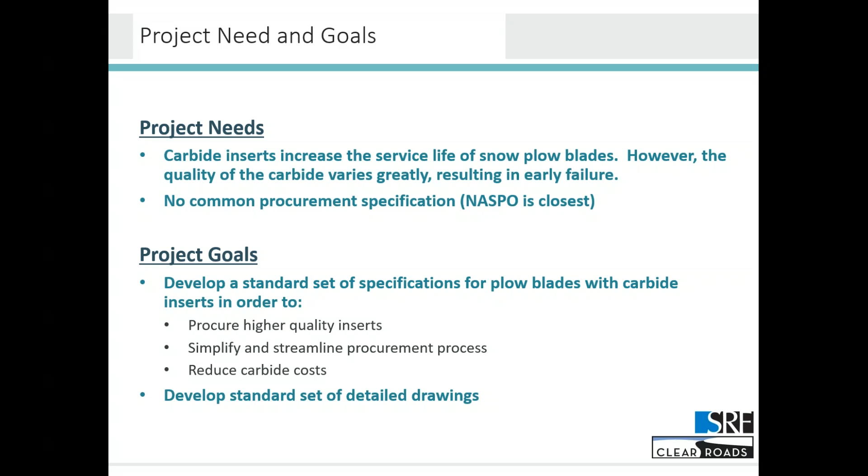So the first thing we conducted was a literature review. We looked at what's been done with other projects, and the main one I want to highlight is Clear Roads 07-01, which I actually worked on along with our sub-consultant Larry Kirchner. This project looked at the development of standardized test procedures for carbide insert snowplow wear, and we looked largely, in a laboratory setting, at what kind of test procedures or inspection makes sense when looking at these carbides, things like looking for visible cracks and doing tests such as hardness, density, porosity, and grain size.

One of the findings of this project was that carbide insert quality and service life are most affected by manufacturing methods, and a poor manufacturing process is more likely to result in a failure than the actual composition of the carbide itself.

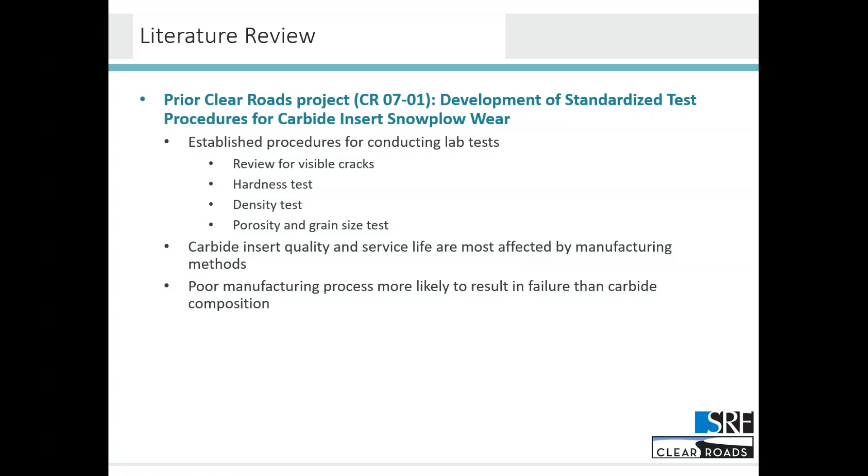So having this background was important, and it refreshed myself. It had been several years since I'd worked on that previous project, and when we started this one up, we dusted off those findings and did a literature search to see what had been done more recently, and not a lot was out there.

We found 7 different studies, the first one dating back to the year I was born, 1967. Some of these were not quite on the mark. A lot of them looked at blade configuration, such as underbody plows versus wing plows, and how effective they were for moving ice and snow, and specialty blades.

One finding was that uncontrollable environmental conditions have the greatest impact on blades, which makes it difficult to isolate exactly how a carbide insert is functioning when the environmental conditions are rough and variable. It was also established that improved plow performance comes with carbide inserts, even if it's hard to measure with environmental factors.

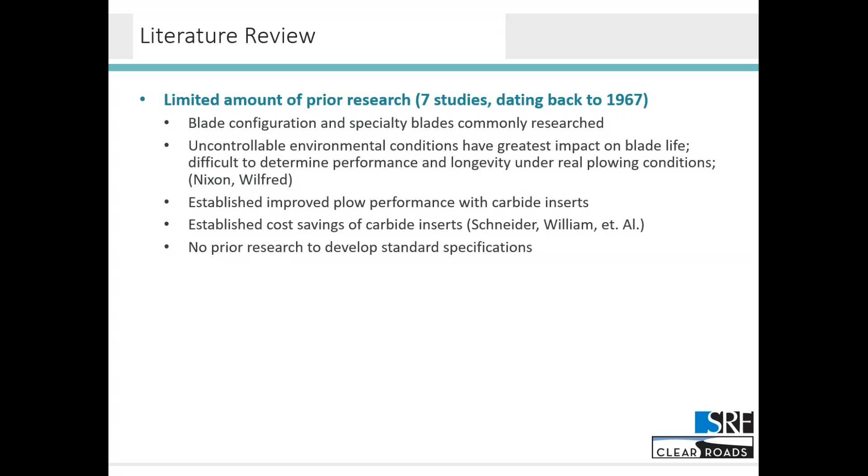There is definitely a feeling overall that blade wear is extended with the use of carbide inserts, and therefore there is cost savings involved. Finally, no prior research had been done to develop standard specifications, which is the topic of what we're doing.

So existing agency carbide specifications was the next aspect of the project, and we took a look at what was being done out there. The clear road states are very organized and were very effective at passing along their specifications. We got a total of 34 different agencies to provide them.

There were 3 states that were not members of Clear Roads that sent them in: New Jersey, New Mexico, and Oklahoma. So those might be candidate states to try and get to join Clear Roads if they're dealing with some ice and snow down there. A couple of counties also sent them in.

9 Clear Road states said they're using the NASPO specifications that I mentioned earlier. We tabulated all these different specifications across multiple individual specs, and there's quite a bit of variety in how different states were specifying these categories, but there's also some commonality as well.

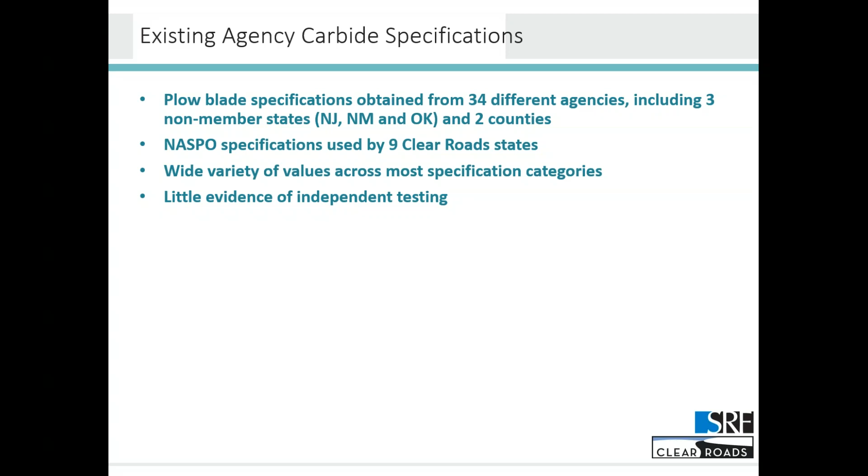We also found little evidence of any independent testing done to verify that the carbide being procured actually matched the specification that had been published.

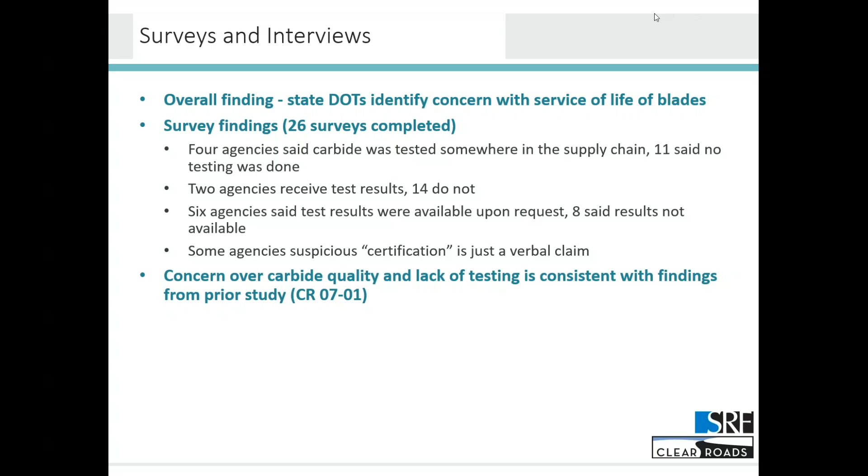We sent out a survey to these vendors. Again, the survey was broad, ranging from questions about number of orders per year to what testing is being performed on inserts before they're shipped. We only received one response on the email survey, so we then had to reach out by telephone, and we were able to receive some valuable input.

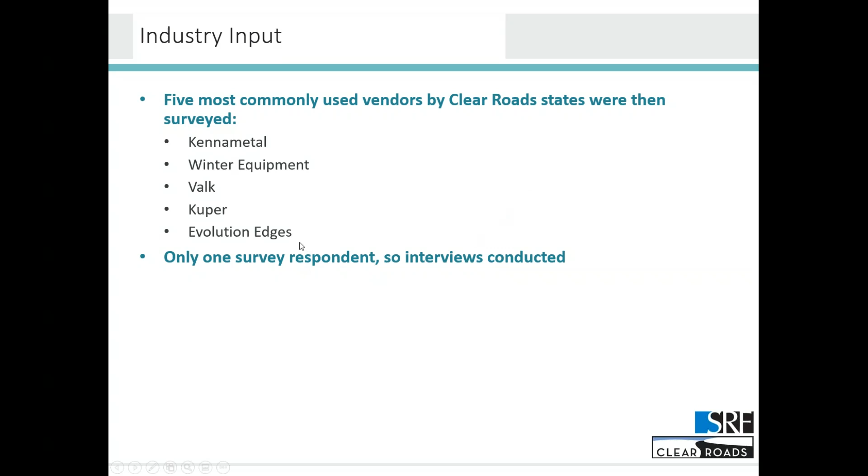So some of the key findings we found out from the vendors we were able to get a hold of are that the trapezoid shape was the most common, but they are seeing an uptick in more bullnose shaped inserts. A lot of them said that an uncommon blade or carbide insert shape, not common with the trapezoid insert, can result in long lead times, and that they do see value in standardizing the specification.

They also mentioned that quality and braze width are important to blade life, and that there was concern that because a lot of agencies do low bid procurement, this results in poor quality inserts and blades. Instead, what agencies are doing is requiring a certificate of compliance without actually doing any end user testing themselves. Quality control is also not consistent among manufacturers.

We also brought up the idea of including an independent testing requirement in the specification, and a lot of vendors seemed receptive to that, to level the playing field.

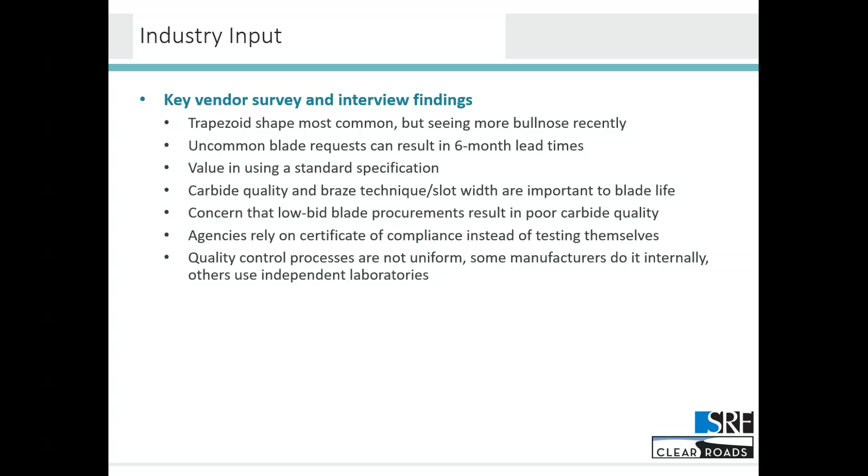Okay, so looks like we're back on the slide we left off on. In addition to our original scope, a plant visit to the Kennametal plant in Pennsylvania was an added amendment to the project based on a request from one of the vendors. In addition to SRF attending the tour, John Fleming with PennDOT and Mr. Pfeiffer with West Virginia DOT were also on the tour. The tour consisted of visiting the manufacturing plant during production, and the second day visiting Kennametal's headquarters, where the tour was broader and focused on ongoing research and innovations.

We felt it was a very valuable experience being able to see the manufacturing process firsthand. Some of the key takeaways from the tour reinforced what we had learned from the initial surveys, that the 25-degree trapezoid shape was most commonly produced by Kennametal, but they were seeing increasing orders for bullnose shapes.

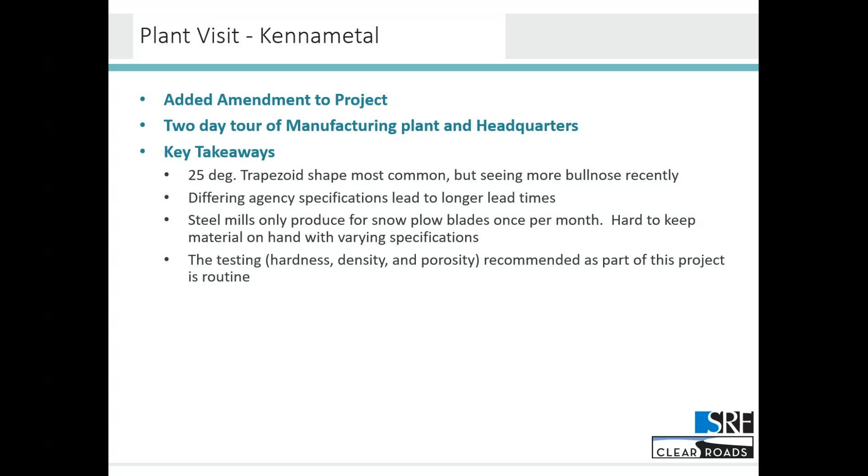Next slide, Eric, and I think you're taking it from here. Okay, Jeremy, can you hear me? Yes. I don't know if it was my internet connection or something with GoToMeeting itself. Eric, there's a little hiccup there. Are you on voice over internet right now or telephone?

Okay, moving on to the data synthesis and analysis task. We took a look at compilations, and based on that we had a starting point, then ran that past our metallurgist who is on our project team, Larry Kirchner with Kirchner and Associates. He took a look at that from his perspective and identified which carbide properties are optimal, and in many cases they were within the range of what the common specifications were already doing. But he also removed the wheat from the chaff and said this doesn't really impact things, so we can remove some aspects.

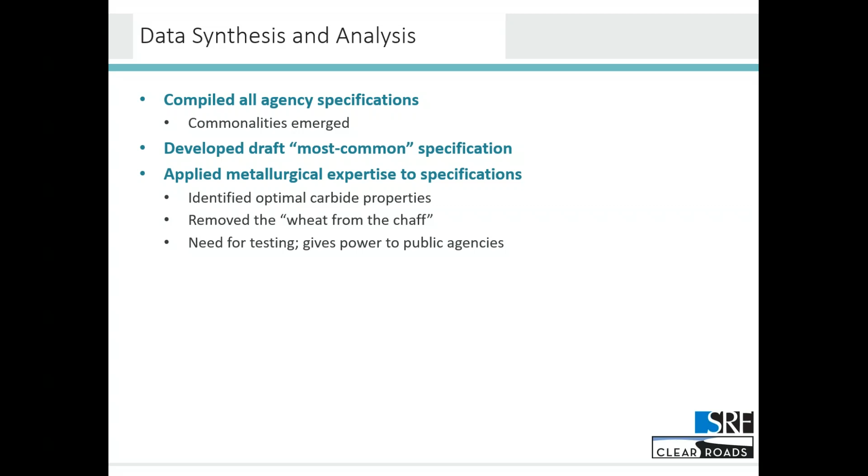In the next slides I'll detail what that was exactly. Another thing Larry brought to the table is the need for testing, which gives power to public agencies to accept or reject blades, or inserts, based on quality. Larry wasn't able to join us on the call today, but I did capture a lot of his thinking, and that's part of what we'll be presenting here.

Moving into some specifics with these standard specifications: some could be removed because they're not relevant. There's a loosely defined concept of grade of the carbide, and the metallurgist said that was not a meaningful measure. Also, transverse rupture strength is not a measure that has a bearing, nor is brazing shear strength. Some key specifications to focus on are the composition of the carbide insert, the different percentages of different alloys.

I'm hearing some background noise. I don't know, Jeremy, is that coming from you? Okay, Eric, I'm going to quickly mute everybody, and then unmute you and Jeremy again. Okay, we're back again.

We also included insert dimensions that are common across all inserts that could be made, and there are several other properties of the carbide inserts that the specifications cover. Some elements that don't impact performance outside of the carbide itself are the steel used in the plow blade. The survey identified three different standards of steel, and when we spoke with Larry about this, he said there are differences in these quality levels of steel, but when you look at how it actually performs in a service condition on the road, they're all fairly comparable to one another.

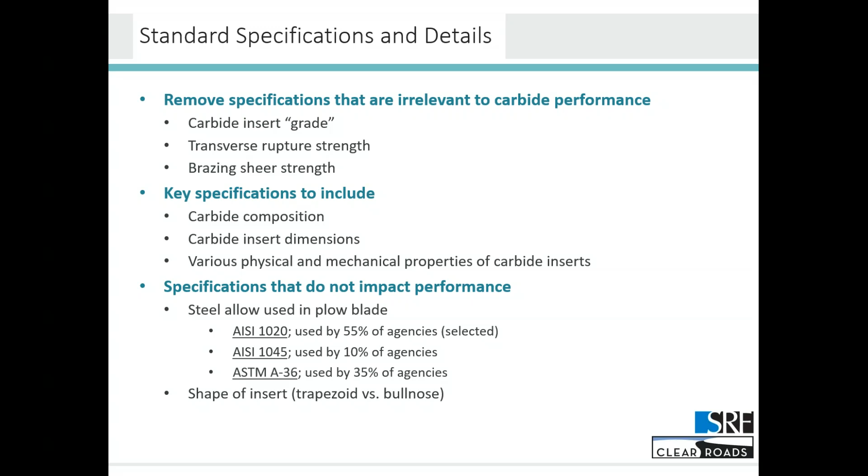Looking at the testing aspect of the discussion, the final report we're putting together is in process, but the Task 4 memo we've issued lays out some best practices for testing. First, using a random sampling technique to select carbide inserts for testing, and then requiring testing be done at an independent lab using standard ASTM test procedures.

I saw a comment in the chat asking about a list of labs, and that's something we could look into, but my understanding is that every major metropolitan area in the country would have metallurgical shops and testing abilities. These ASTM tests are pretty common and standard, and there should be a local lab throughout the country that can do this kind of testing.

Continue to require certification of compliance for some of the specs that can't really be tested in a lab, and also don't be too stringent in interpreting the test results. There are going to be some qualities that are missed by a little bit, and when you look at the bigger picture, maybe that's a good blade and it should be accepted. So there's an AQL process, acceptable quality level, that helps determine this is acceptable without going by the letter of the law for every single test result.

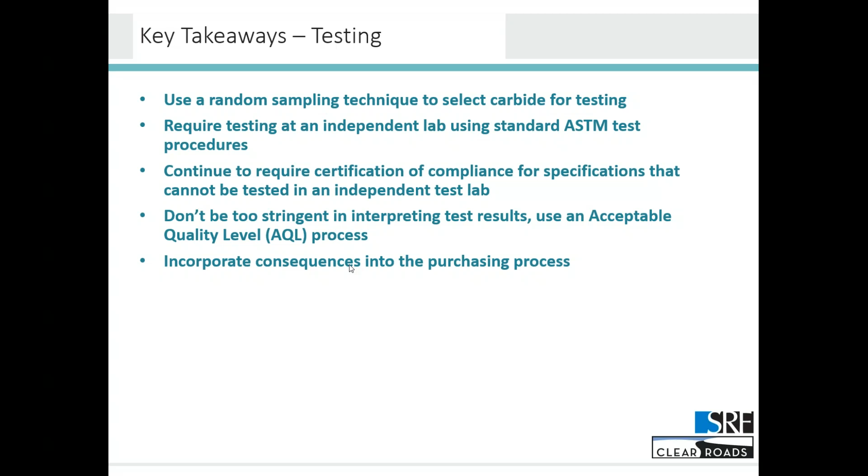So the first category of specification is basically a one-page spec that we developed, and I broke it into 3 slides. I don't think it's worth the time on the phone to go through all the specifics of what's in the spec, so I'll just touch on some high points. This first third of the spec deals with the plow blade itself, the steel portion of the blade, and talks about the dimensions of the blade.

The spec also was split into a trapezoid spec and a bullnose shaped spec, and I've combined them for simplicity in this presentation, but they're basically the same spec with just some differences related to the shape. I've provided those 2 different shapes here so people can look at what this looks like. On the left is a trapezoid - this is upside down, you would have it flipped 180 degrees for the part touching the pavement, but the contact is made with either the trapezoid or the bullnose on the pavement. I think that's all I need to cover on that slide.

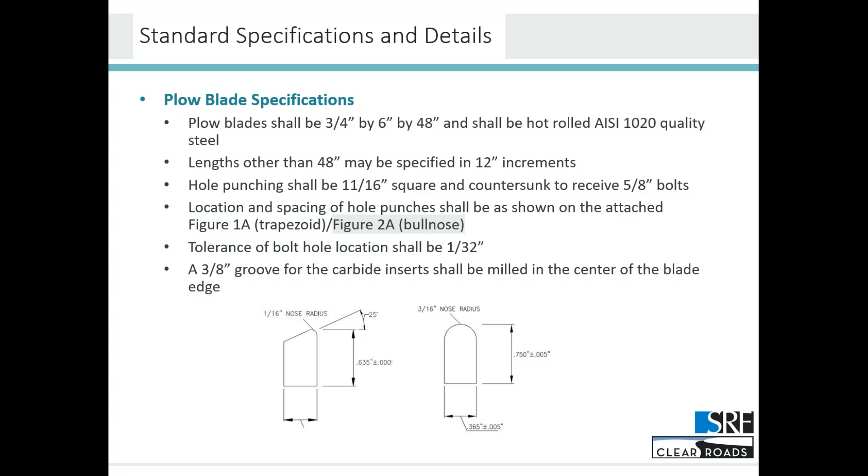The next third of the specification is about the carbide itself, and the first grouping here is about the material composition, with the tungsten component, the cobalt, and then 1% maximum allowed for any other elements.

There is some range in percentages here, and if you're within this range, you're going to have a quality carbide itself. Then we identify the different shapes of trapezoid versus bullnose. The inserts themselves are 1 inch long in length, and you can see the thickness and height is specified as well, and the radius, the curve shape of the insert.

The next set of bullets involve how you define the performance of the carbide. Hardness is one aspect of performance, and the value there can be tested with the ASTM test procedure B294-92. Density, expressed as grams per cubic centimeter, can be tested with that other ASTM spec 311-08.

Porosity is defined by the grain size in 3 different levels of grain size, and there's ASTM testing standards that define that porosity for each of those different thresholds. And then finally, there's a visual inspection of cracks and any laminations that is done to physically look at the insert itself.

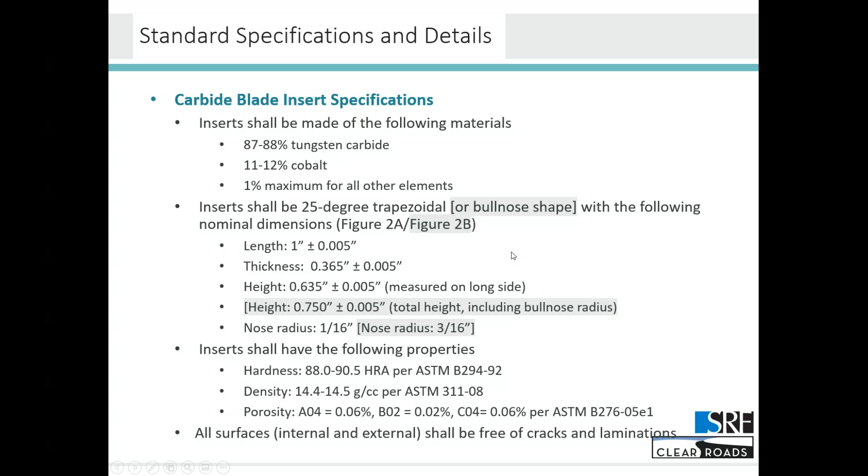The last chunk of the specification deals with brazing, and this was an interesting aspect. We heard from the manufacturers that this was an important element to review. But in talking to our metallurgist, he said that the brazing really isn't that critical—it just needs to hold the carbide insert within the blade, and as long as it doesn't fall out, it should work and perform fine.

Some of the aspects of brazing that we do have in this specification deal with the space between the insert and the metal, the steel of the blade itself. We want to keep that down to 1/100 of an inch, and braze the inserts on all sides, avoiding any voids or shims because of lack of close contact between the insert and the slot. Generically, use quality materials, methods, and qualified certified technicians. And then I mentioned the gaps piece before as well.

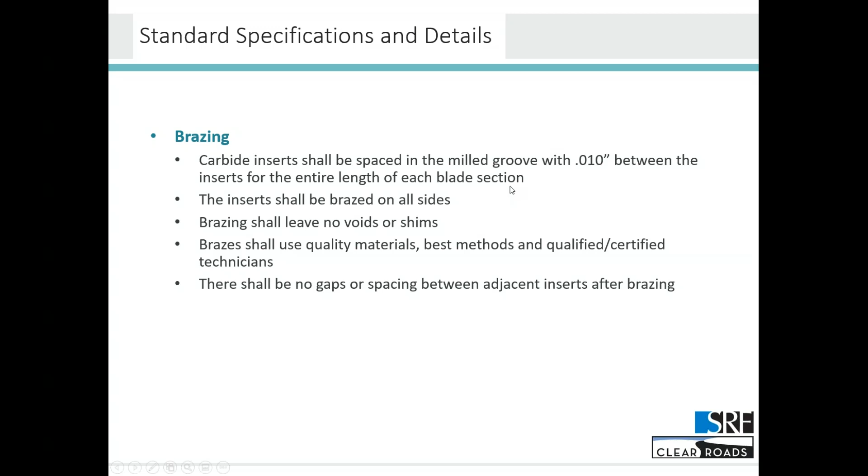The next figure in Appendix A is the size of the insert itself—in this case the trapezoid—has a width of 1 inch plus or minus 0.005 of an inch, and the other dimensions here as shown.

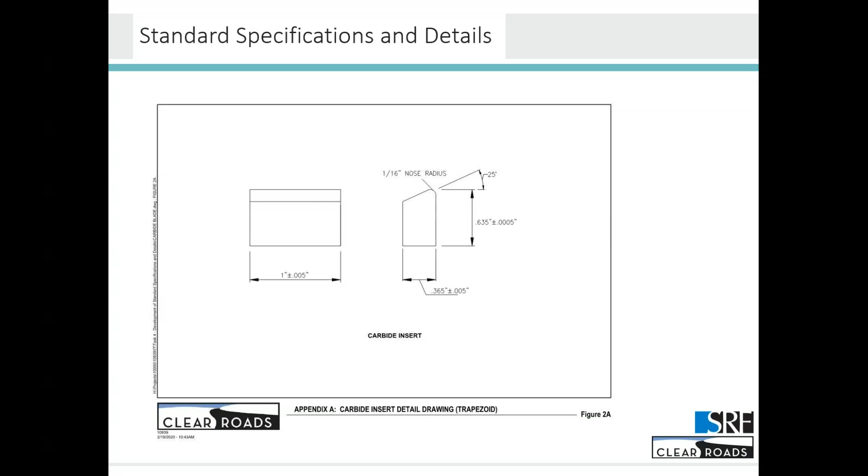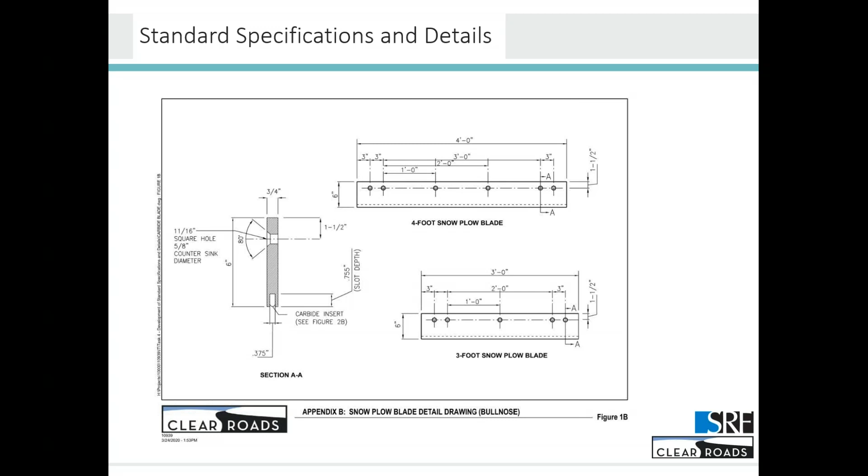Appendix B is the same information, and it's for a bullnose shape. The only difference on this figure is the slot depth—it's a little bit deeper to accommodate the size of the insert. Otherwise, the other dimensions on this figure are the same, and then the shape of the bullnose itself.

Okay, moving on. The other aspect that's included in the specification are some test procedures. This is language that would come after you've detailed the carbide needs to have this certain hardness and chemical composition properties, and then this is a testing procedure we propose to also have included in the spec.

The first bullet deals with requiring ASTM testing, which I mentioned specific tests for before, that be done on a representative sample of each lot of carbide materials. And the next bullet deals with determining acceptance of those test results using the AQL process.

And then it goes on to talk about how the department or purchasing agency has an opportunity to review and either accept or reject that carbide material. If something's rejected, tests need to be done on a different lot of carbide and resubmitted for consideration. So the intent here with the testing is to put some teeth into what before had often been brushed off or verbally said, yeah, we're in compliance, to say, well, prove it. There's a big impact on the service life of these blades. If poor quality inserts are used, especially in a low bid environment, you're going to have issues with performance. This gives an objective testable method of sampling carbide, testing it, and rejecting it if it does not meet those expectations.

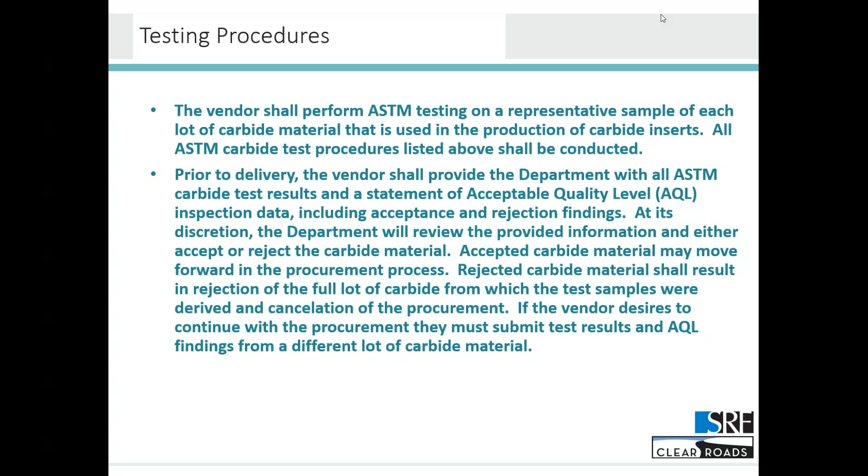All right, so in conclusion, the one finding of the project is the quality of the inserts does impact the plow blade service life. There are several needs we identified for developing a standard specification. First, the existing specs vary greatly, and that impacts the ability of different agencies to get timely and cost-effective procurement of blades. We also found some specifications do not relate to blade performance and could be ignored. The blade manufacturers would have to develop multiple products if there isn't a standard specification. So the testing requirements will provide consistent carbide quality and give agencies leverage in accepting or rejecting poor performance in their carbide. Finally, we developed those two standard specifications that I just reviewed. So that's kind of in a nutshell how the project unfolded and the findings we had.